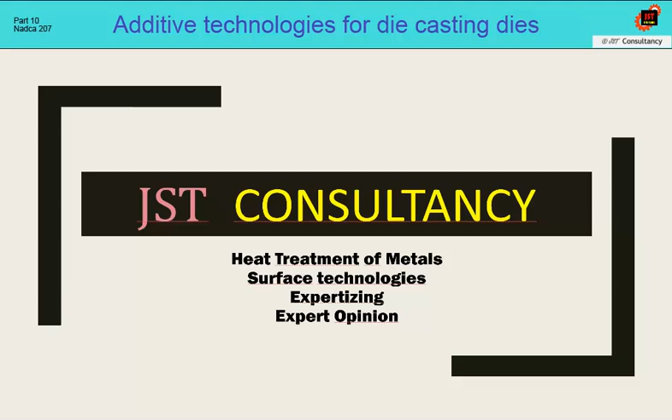In this tenth part of the course, we will focus on additive technologies that come into consideration for the production of die-casting dies. Additive technology brings new possibilities to the production of die-casting dies. However, because it is a completely new, rapidly developing technology, there is a lack of support in process design, similar to that provided by Nadca 207 for classically manufactured steel materials. Therefore, we will try to clarify some of the problems and explain the content of the newly published Nadca 550 document, entitled Tooling Certification for Die-Casting Die Components Fabricated by Additive Manufacturing.

Although additive technologies represent modern and progressive methods of manufacturing metal parts, it must be said that Nadca 207 does not yet know these technologies. The word doesn't know should be understood in the sense that it has not been verified that 3D printed parts have identical properties to parts produced by conventional methods, and it is therefore not entirely clear what their resistance to thermal fatigue will be. It is also not yet resolved if the powder materials for 3D printing are identical to those classically produced and recommended, or if they will be recommended completely differently.

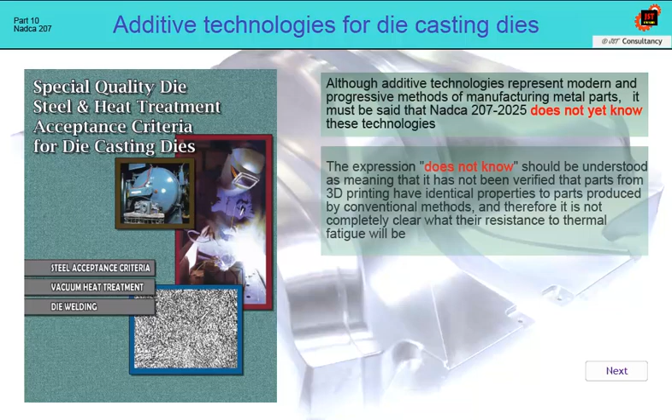The problem must also be seen with standardization. Therefore, in order for AM technologies to have the same definition as classic ones, there must be standards for terminology, parts design, powders, for printer qualification, for printing processes, for all post-processes including hot isostatic pressing technology, for testing, or for operator qualification. Only when all this is done can additive technologies appear in the Nadca 207 specification.

But it takes time. The first step is the document published by Nadca under number 550. It already partly answers our questions about 3D printing, but still in a general way. However, it does not address the lifespan of the mold parts produced in this way at all, and is therefore only a basic document, which must be followed up with more detailed specifications in the future.

Therefore, it is necessary to accept the fact that the use of inserts from 3D printing technology has a legal pitfall in that it must be approved by the tool owner or the die-casting foundry, which will use the tool with an emphasis on economy and with awareness of all possible risks.

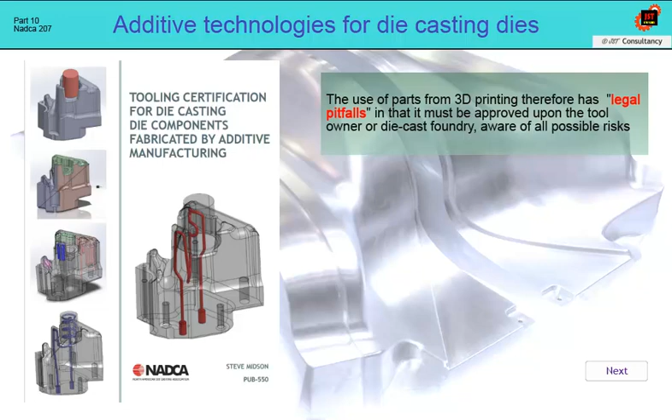Even before we start in this course with the description of individual technologies and operations, we should ask ourselves what our expectations and our doubts are. How should we actually prepare drawing and technological documentation for individual parts of the die-casting die?

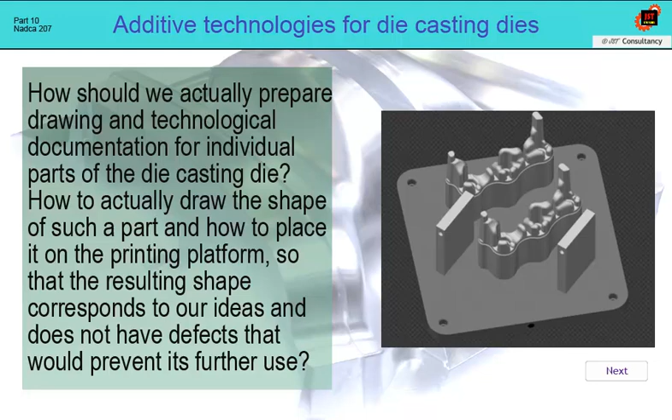How to actually draw the shape of such a part, and how to place it on the printing platform so that the resulting shape corresponds to our ideas and does not have defects that would prevent its further use? How to ensure that after printing we get a net shape, or if that is not possible, a near net shape? Which powder steel should we choose for our part in the die-casting dies?

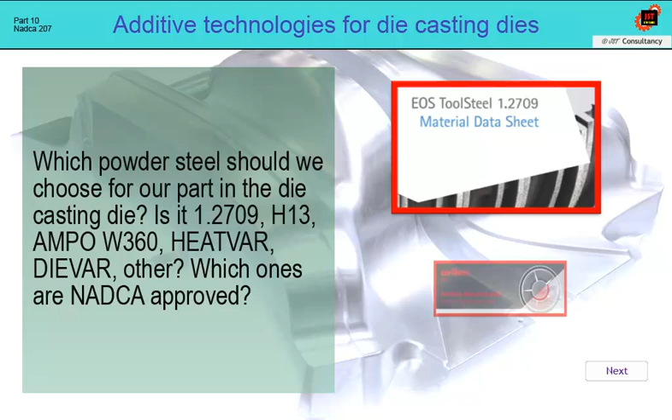Is it 1.2709, H13, Ampo W360, Heatvar, Dievar, or other? Which ones are Nadca approved? If we already choose powder steel, is it described what the quality of this powder should be?

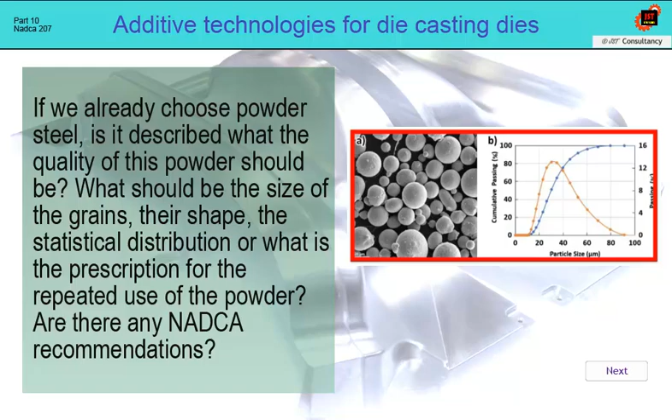What should be the size of the grains, their shape, the statistical distribution, or what is the prescription for the repeated use of the powder? Are there any Nadca recommendations?

If we print a part from the selected powder steel, is the permissible porosity of the parts defined after 3D printing? And is it even economically possible to print parts with minimal porosity? Is there any Nadca regulation or recommendation for printing parameters?

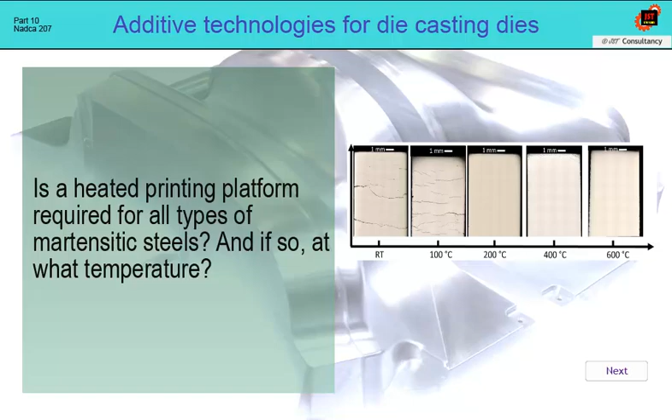Is a heated printing platform required for all types of martensitic steels? And if so, at what temperature? As in heat processing, the vacuum furnace must be in a validated state, according to AMS 2750. Is there any regulation that says how to validate the printers so that the results are reproducible?

If we already print the part, is there a prescription for heat treatment and all other post-operations to maximize resistance to thermal fatigue? Under what conditions can hot isostatic pressing be omitted? And under what conditions must we apply it?

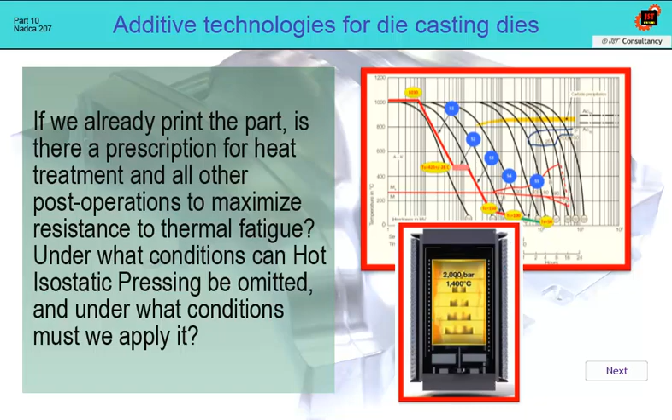Is there any regulation on how to test the print result? It can be assumed that we will need to perform reference toughness tests on each printing platform to verify the printing process. Do we have information on how to place these samples on the platform and in which direction, so that they best represent the state after printing?

We will try to answer all these questions on the next slides.

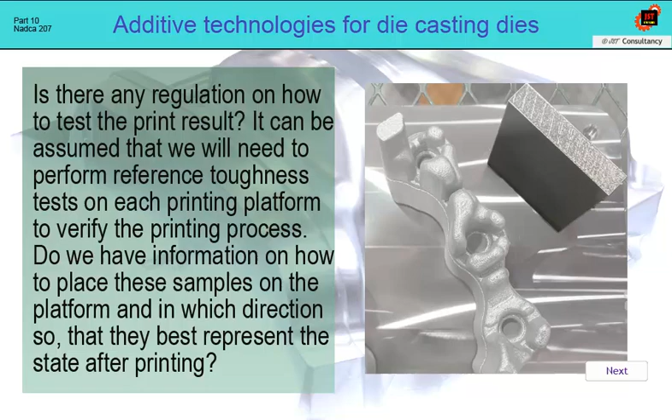What do we actually imagine when we think of additive technologies? These are new, modern production processes based on powder technologies. Their benefit is completely new possibilities for the production of shaped inserts.

On the other hand, this novelty is an obstacle because they are not sufficiently verified, and therefore they are only slowly getting into norms and standards. The development of the Nadca 207 specification shows how long and complicated the path was to create a generally recognized standard

for achieving maximum resistance to thermal fatigue for classic wrought steels. It is therefore a long way off, and the full integration of AM technologies into production processes will take some time. However, not all of these additive technologies are suitable for die casting molds.

Therefore, all those that use binders, such as the binder jet method, MIM, metal injection molding, can be excluded. In the following, we will therefore only deal with technologies that work only and exclusively with the application and melting of metal powder without a binder.

With AM technologies, the part is created on a 3D printer by gradually applying layer by layer. What takes weeks, sometimes even months, with conventional technologies can be achieved in days and with a single clamping.

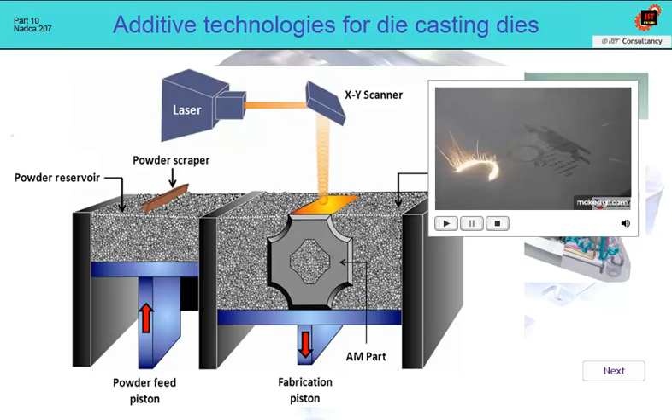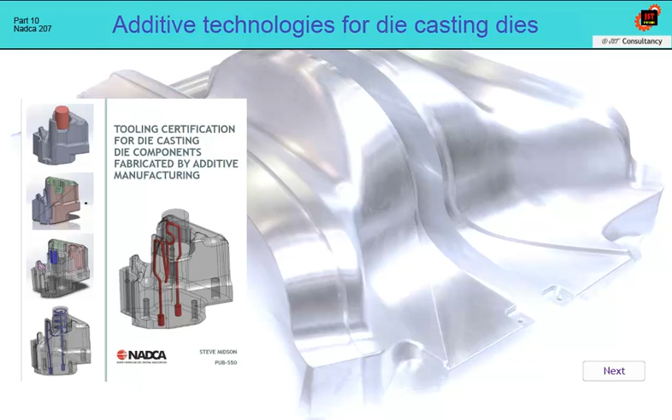If we are going to talk about AM technologies according to Nadca publication number 550, then we have to focus only on those that are applicable to die casting dies. There are two basic ways.

The first is a method called direct energy deposition or direct metal deposition. This is a method where a layer of metal is applied from additional powder or wire by fusing with a laser or an electron beam.

This method can be advantageously used for repairs and renovations of die casting inserts, or for surface modification, but only exceptionally for prototyping. Considering the way the process is conducted, there is no significant dimensional limitation on size.

For example, this device for DMD technology is a portal version with a table size of 1000 by 600 millimeters.

The entire range of powder materials can be successfully applied, from powder steel type H13 through maraging steel 1.2709, various stainless steels to superalloys based on titanium, chrome, or nickel.

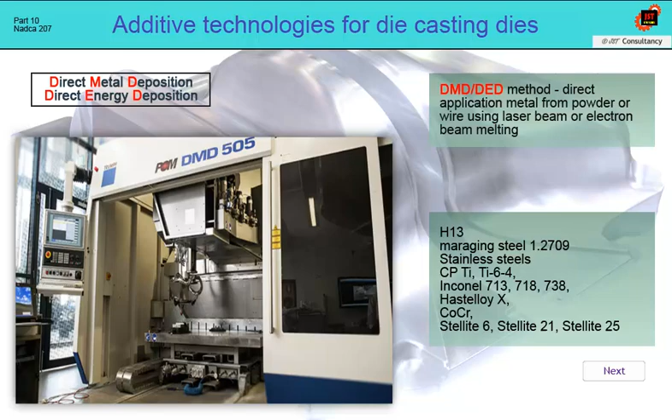However, it is necessary to take into account that, even in this case, printing must be followed by some heat treatment procedures, especially annealing to remove stress. This is also why access to the same size equipment for heat treatment must be ensured.

The method is not suitable for the production of large compact inserts due to the high investment costs and the size of the equipment. Printing time combined with high depreciation will create a significant economic barrier.

A new progressive solution to this technology is also a series of machine tools from the DMG Mori company. For example, the LaserTech 125 DED Hybrid, where the application of powder materials by the DED method and the subsequent machining of dies are combined in a completely unique way.

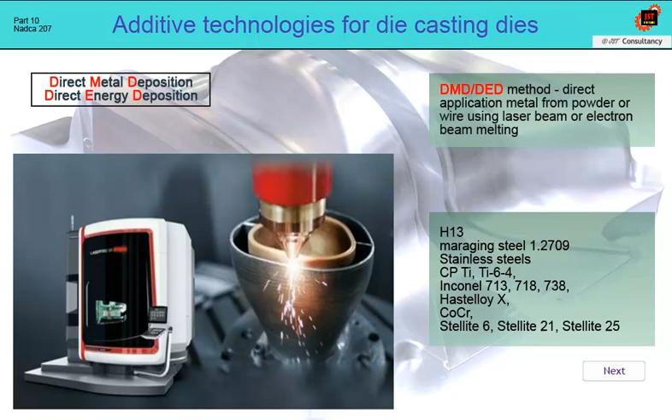The second method, according to the Nadca 550 publication, is the powder bed fusion method. It is a 3D printing process where the printed product is created layer by layer by gradually fusing the powder.

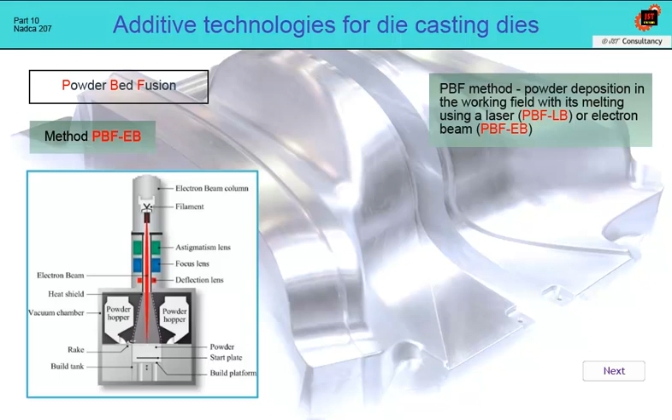Two basic methods are currently used: the electron-beam melting method, when the melting source is an electron beam, and the selective laser melting method, when a laser beam is used to melt the powder.

In the first case, the layer is formed in a device with a high vacuum, because this vacuum is a condition for the existence of an electron beam.

In the second case, the layer is applied under atmospheric pressure of a neutral gas, such as nitrogen or argon. However, the laser beam and electron beam methods are so different that they are not interchangeable, and this needs to be taken into account when manufacturing die casting dies.

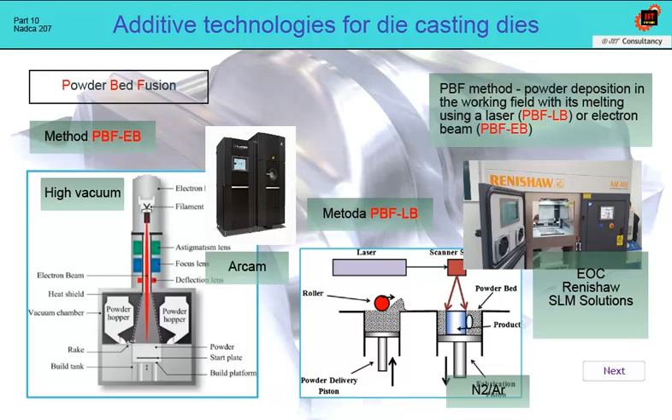Equipment representatives for the laser bed fusion method are equipment from EOS, Renishaw, or SLM Solutions, while for the electron beam method, they are equipment from Arcam. For clarification, the name SLM is the trademark of the technology of the company SLM Solutions, and the abbreviation DMLS is the trademark of the company EOS.

Today, the most widespread printing method is powder bed fusion with laser beam. This type of printer allows you to print all metals as alloys of copper, aluminum, titanium, and various types of steel. The process takes place under atmospheric pressure of nitrogen or argon, depending on the type of material.

Due to the intensity of melting, gaseous nitrogen can be partially split into atoms, and it can then bind to the molten metal in the form of nitrides of alloying elements, such as chromium, molybdenum, vanadium, titanium, and others. Therefore, for highly alloyed materials with nitride-forming alloy elements, it is necessary to use neutral argon gas. This also applies to material H13 or

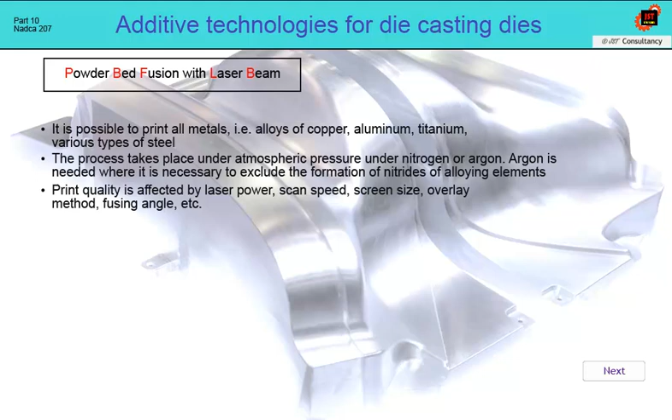1.2709. The quality of the print is affected by the laser power, scanning speed, raster size, the way individual traces are overlapped, the fusing angle, and many others.

The actual product is printed on a metal platform that can be preheated to 200 to 500 Celsius, but the powder melts when cold. Due to this method of printing, the product is subjected to high stresses, and within 24 hours after printing, it should be subjected to annealing to remove the stresses.

If an air-hardenable material such as H13 powder steel is being printed, then this problem is even more pronounced due to the martensitic transformation taking place.

The advantage of this method is its availability, and above all, the fact that the powder enclosed in the cooling channels is easy to extract after printing. This property enables printing of special inserts with cooling channels, unproducible by classical methods.

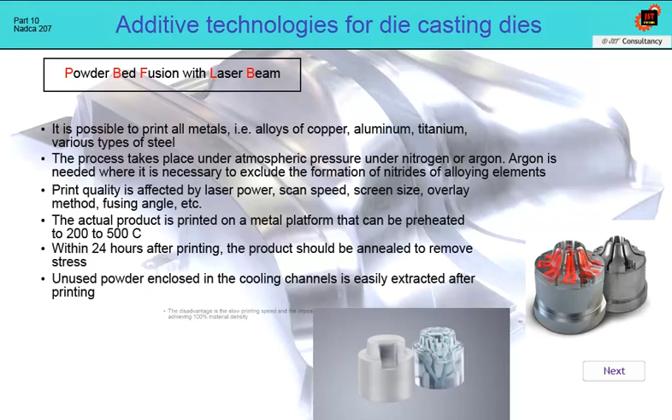The disadvantage is the printing speed. Pictured is a spare part made of 1.2709 material weighing 89 kilograms, which was printed on a printer with 4 lasers for 17 days. This method cannot print a product with 100% density.

The maximum achievable density is tied to the economy of printing. If we want to apply this printing method, then the production process consists of the following operations: pre-operations, actual printing, annealing to remove stress, and separation of the product from the base plate.

If we want 100% density, then hot isostatic pressing, heat treatment for H13 material hardening and at least 2 tempering cycles, cleaning and surface treatment, product inspection and completion.

The condition for applying the powder bed fusion method is therefore not only a printer, but also a stress annealing furnace with temperature range according to the printed material, or access to hot isostatic pressing technology and vacuum heat treatment.

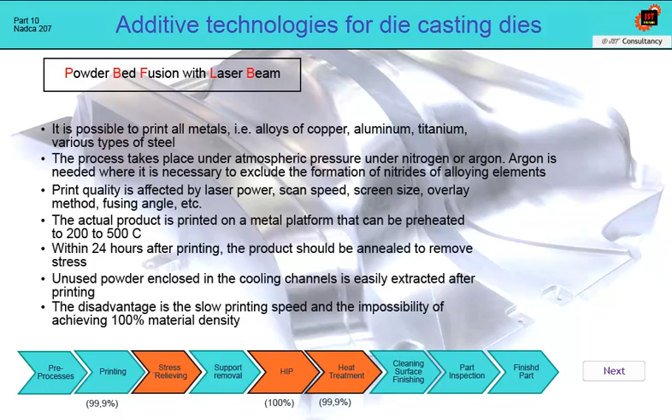In the following video, you can see how the printing method looks in practice. The source of the video is promotional materials from EOS Company.

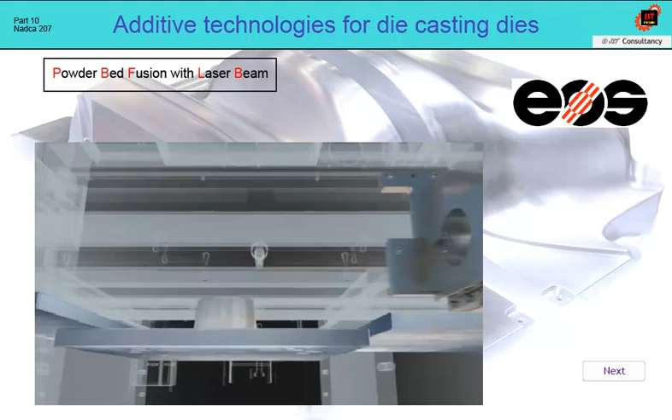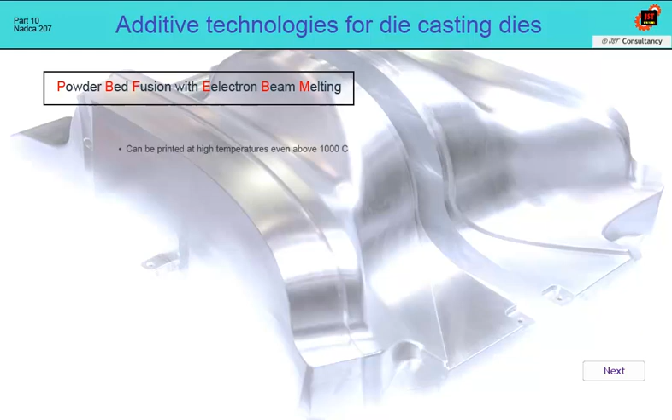The second printing technology, electron beam melting, has some advantages over the method with laser beam. Above all, it is possible to print at high temperatures, even over 1000 Celsius, and thus without significant internal stresses. There is therefore no risk of the product having cracks, as is the case with the laser method.

The electron beam has significantly higher performance and scanning speed. The print surface is first preheated by the electron beam, then the contours are created, followed by hatch melting. Because the beam has a high speed, it can simultaneously print several products at once.

As in the previous case, the print quality is tied to a number of process parameters. Their setting is then part of the know-how of the one who prints the products.

The disadvantage of this type of printing is that it is not possible to print easily vaporizable metals such as zinc, magnesium, lead, or copper, and alloys of these elements.

But the big advantage is that it does not need a platform for printing, and the parts are printed in space in a powder bed. Therefore, the volume of the chamber can be better used for printing efficiency.

A big disadvantage is that due to the high energy of the beam, the area around the printed product is also affected, and it is therefore not easy to extract the powder from narrow or blind cavities.

This is a major weakness of die casting dies, and therefore this type of printing on die casting inserts will only be used exceptionally. The production procedure will be similar to the previous case, but it will not be necessary to apply the annealing operation to remove stress and separate the product from the platform. So the following steps are: pre-operations, printing, removal of products from the powder bed, and cleaning from the powder.

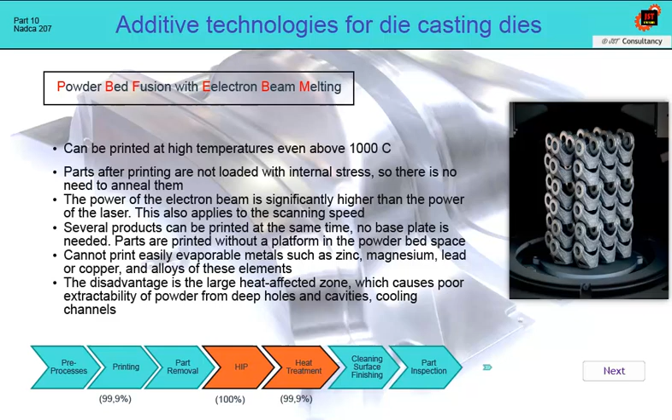This video will show you the electron beam printing method. It is a presentation material from Arcam.

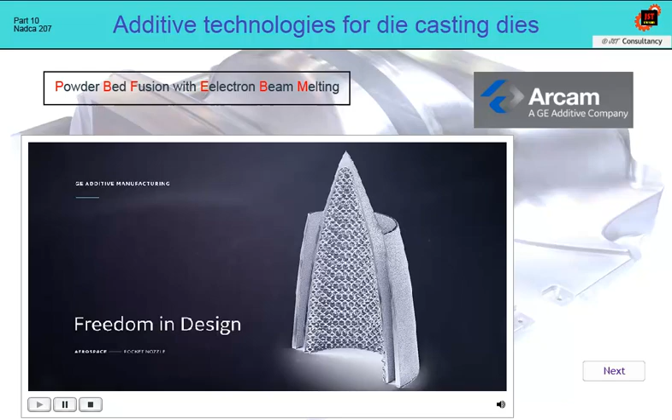Additive manufacturing offers greater freedom in design and allows for the creation of optimized parts that are not constrained by the limits of traditional manufacturing. Arcam EBM has the unique ability to tightly stack parts within the build in order to increase productivity.

An optimized build file is sliced and loaded into the Arcam EBM system. Following this, metal powder is loaded into the machine. The build chamber is then closed and a vacuum is created to ensure a clean, controlled environment that allows for the processing of reactive material.

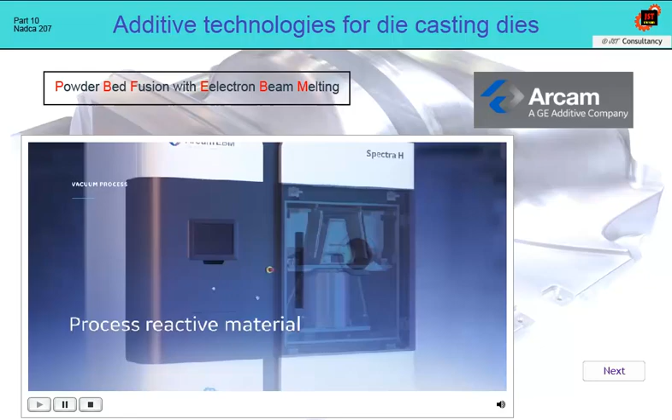Next, Arcam EBM's powder layering system evenly distributes a thin layer of powder on the build area. A powerful 6 kilowatt electron beam heats the powder bed to the optimal ambient temperature and then proceeds to melt the powder: first contour melting and then hatch melting.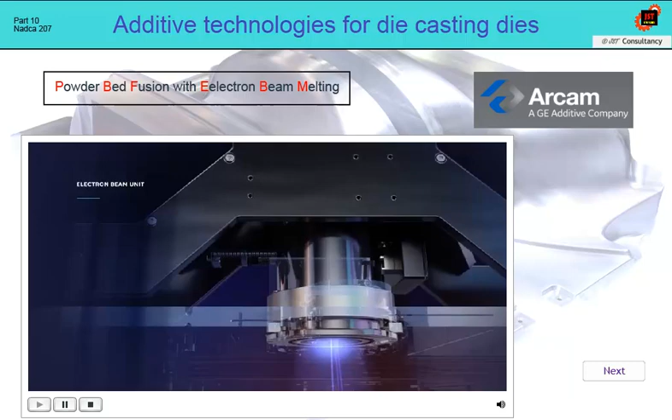The electron beam unit generating the beam contains no moving parts, allowing for extremely fast and accurate beam control. The build environment is kept hot, reaching temperatures exceeding 1000 degrees Celsius, resulting in no residual stresses and allowing for the processing of crack-prone materials.

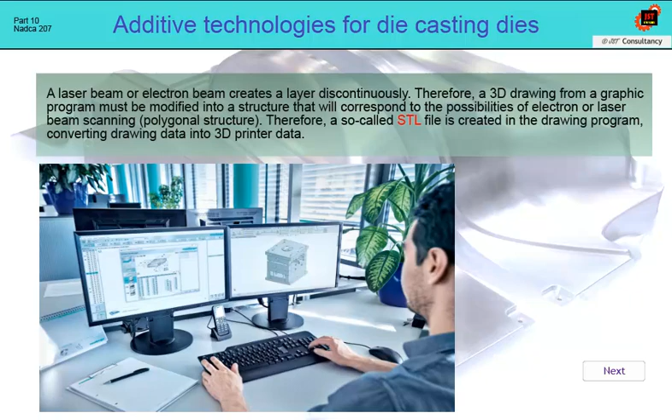The beginning of every design for 3D printing is digitization. We draw what we wish to produce in a 3D graphics system. Today, the most commonly used professional systems are AutoCAD, SolidWorks, CATIA, but free programs such as FreeCAD and many others are also considered.

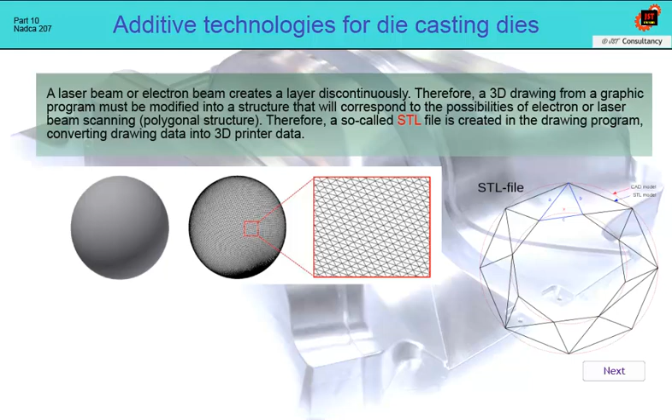What is important is that the drawing must be converted into a polygonal structure corresponding to the scanning motion of the laser or electron beam. A so-called STL file containing instructions for the 3D printer is created. This file represents the transformation of our idea into data for 3D printing.

The density of the polygon mesh for printing is adjustable, and the printing time will correspond to this density. The material density or porosity will also correspond to the printing strategy, as well as the mechanical properties, or as a result, the material's resistance to thermal fatigue.

The printing strategy is also very important for the result. As you can see, it can be one-way, two-way, or so-called zigzag, in the case that the beam melts the material alternately there and back.

Part of the printing strategy is the multiplicity of remelting, where one spot of the surface can melt once, twice, or even 3 times. This will, of course, be reflected in the porosity of the material and the number of defects after printing. As part of the printing strategy, the target density requirement is also set.

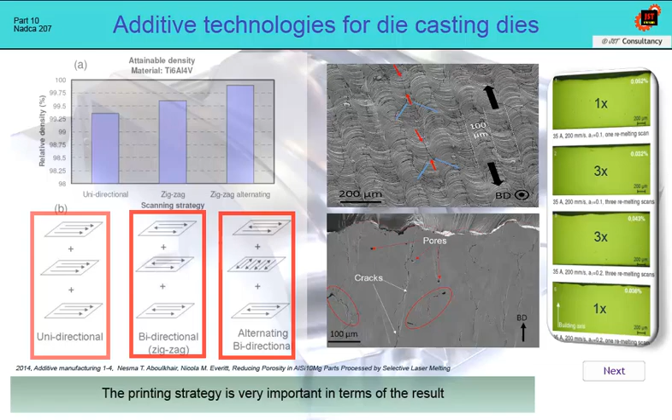As a very important parameter for hot work steels of type H13, as well as for other carbon steels with martensitic transformation, is the temperature of the substrate plate. This has a significant effect not only on the internal stress, but also on the resulting density and structure.

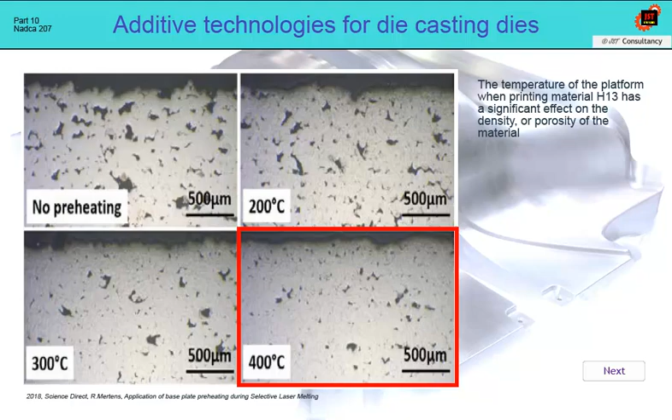One of the reasons is that if we print at a temperature above the martensite start, one of the problems is reduced, which is the martensitic transformation in the initial stages of printing. It has been verified that if the platform temperature is 400 to 500 Celsius, then the applicability of this technology for hot work steels will be significantly improved.

Even if it is only a preheating of the platform for the initial layers of printing, it must be remembered that other subsequent layers are heated from the melting process, and when the printed product is gradually immersed in the powder bed, the body of the printed insert will maintain a high temperature in the powder.

Heating to 500 Celsius significantly reduces the stress in the printed product and at the same time reduces the effort to bend. On the left of the picture is the prediction of internal stresses in a body made of titanium alloy.

Ti6Al4V material at a substrate plate temperature of 500 Celsius, on the right side at 200 Celsius. Internal stresses are significantly lower.

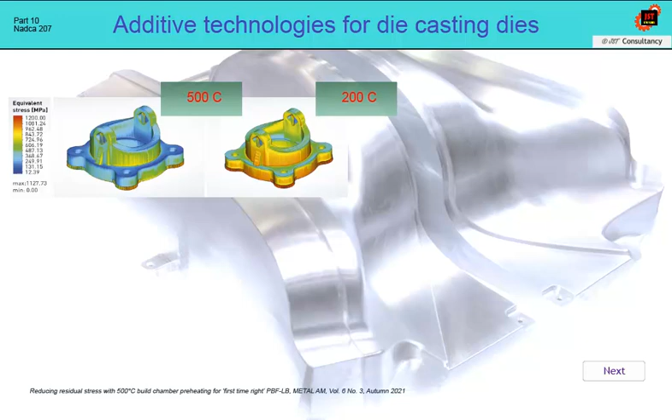Printed at a temperature of 200 degrees Celsius, image on the right, and the state after printing with a heated substrate plate at 500. The difference is quite obvious. The high temperature of the platform reduces the stress in the printed product, and thus also the tendency to form internal cracks.

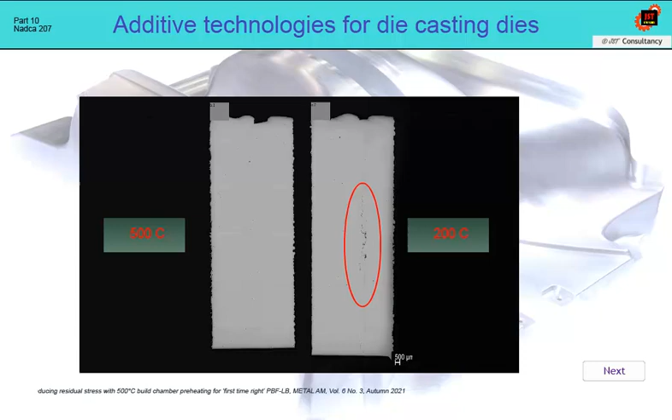The strategy of the printing will fundamentally influence its economy. If we were to try to print a cube with a side of 200 millimeters and a weight of approximately 63 kilograms, with a thickness of individual layers of 100 microns, the distance between the tracks also 100 microns, then the printing time would be 18.5 days.

At an estimated hourly rate of the printer of 100 euros per hour, the price of printing would be 44,000 euros. The print density will be somewhere around 98%. We don't know if it's acceptable quality, but it's definitely an unacceptable price.

If we increase the grid to 200 micrometers, then the price will drop by half. But at the same time, the porosity of the material will increase to 89%. But this is already a value that does not guarantee us high-quality mechanical properties.

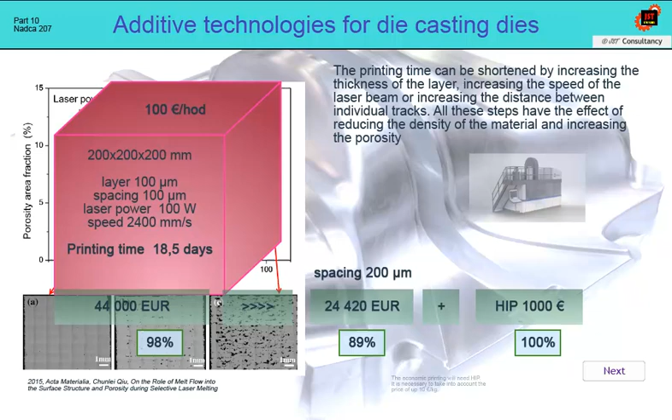That's why we have to start thinking about hot isostatic pressing technology. Even if we have a density of 89%, after applying hot isostatic pressing, we will achieve a density of 100%. However, the cost of HIP will only be up to 1,000 euro, meaning a saving of almost 20,000.

It is a question of what criteria to set for the use of HIP technology, when yes and when not. We do not know the relationship between the toughness of the material, resistance to thermal fatigue, and porosity. But since porosity represents random defects that we cannot recognize from a macroscopic point of view, hot isostatic pressing significantly increases our certainty that these random defects will be removed.

At the same time, it allows us to print with significantly lower density, which means cheaper. Therefore, if printed parts are to have the same service life as parts made of forged material, hot isostatic pressing technology should always be used.

I have already mentioned the example of printing a moving part of a die made of powder maraging steel 1.2709, weighing 89 kilograms on an EOS M400 printer with 4 lasers. The printing time, even though it was done on the most modern and powerful printer, took 17 days.

And what was the economic result? When all the costs and all the benefits were added up, the overall result of the project was a loss of -40% compared to the state when this part was manufactured in the classic way.

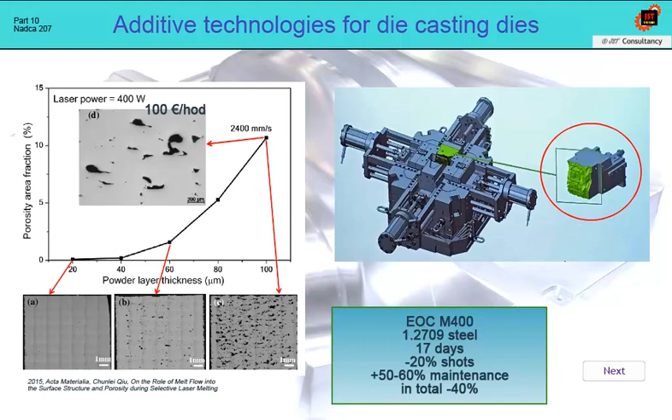What exactly is HIP technology? It is a technology called hot isostatic pressing, and its meaning is that at close to the material's melting temperature and at high pressure of up to 2,000 bars of argon, it suppresses most of the porosity inside the material.

This is also very important for die casting dies. If a printed part is to have the same thermal fatigue life as a compact, classically produced material, it must also have 100% density, or be close to it.

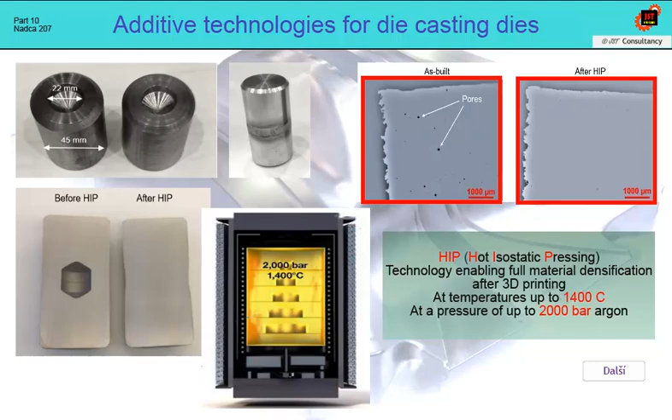But there is one more aspect, that is the reliability of the result. The pores in the printed product are randomly distributed. They may or may not be there. But this cannot be recognized from a macroscopic point of view only by destroying the part and doing metallographic evaluation. This is, for example, the problem of blades for aircraft engines, produced by the investment casting method. Precisely because there is no certainty of a non-porous state, the hot isostatic pressing operation is mandatory on every piece.

The same principle must therefore also be applied to die casting dies if we want to maximize service life. The only problem is that hot isostatic pressing production capacity is not always available, so the problem is circumvented by trying to optimize printing so that HIP does not have to be applied. This means choosing a printing strategy so that the density of the material after printing is as close as possible to 100%. But economic reasons clearly speak in favor of HIP technology.

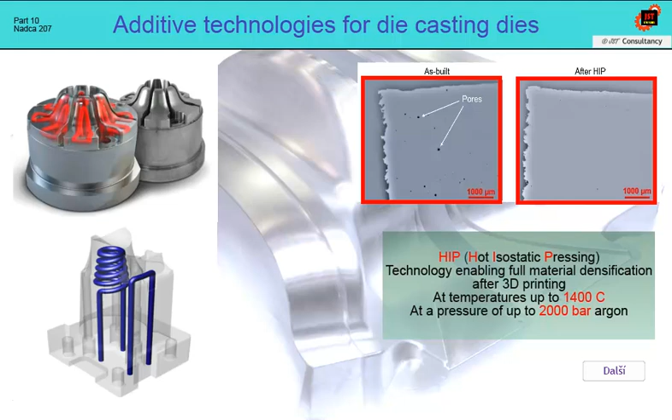If we accept the current situation where HIP is not available, and at the same time the printers only have a heated platform up to 200 Celsius, then we have to put up with high internal stresses in the printed product. This applies both to maraging steel 1.2709 and especially to carbon steels with martensitic transformation of the type H13, Dievar, AMPO W360, and others. Examples are in the picture.

The disadvantage of internal tensions is that they are not tangible, and we only find out their presence at the moment when a crack occurs. In order to avoid this, it is necessary to include stress relief annealing as quickly as possible, within 24 hours at the latest. This stress relieving is done before the printed part is separated from the printing platform.

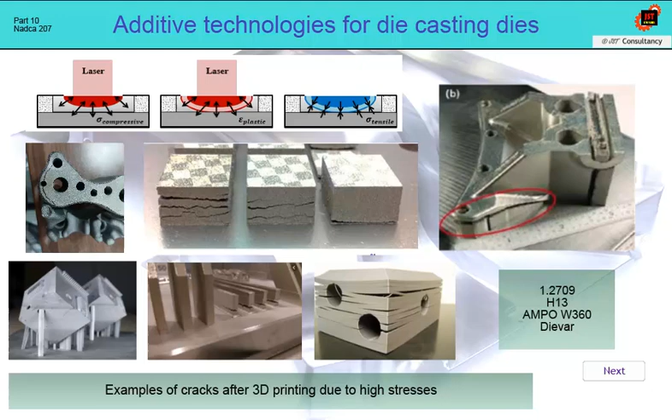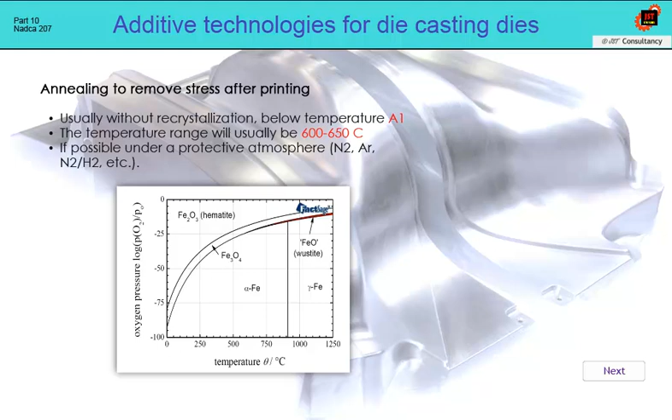Stress relief annealing is a process without recrystallization, below temperature A1. The range from 600 to 650 Celsius is usually used, but it depends on the material from which the product is printed. Since annealing takes place at temperatures where oxygen diffusion can already play a significant role, it is necessary to anneal in a protective atmosphere or, even better, in a vacuum furnace. This is the only way to prevent oxidation along the grain boundaries, which can worsen the impact strength of the material. Stress annealing without a protective atmosphere is not recommended.

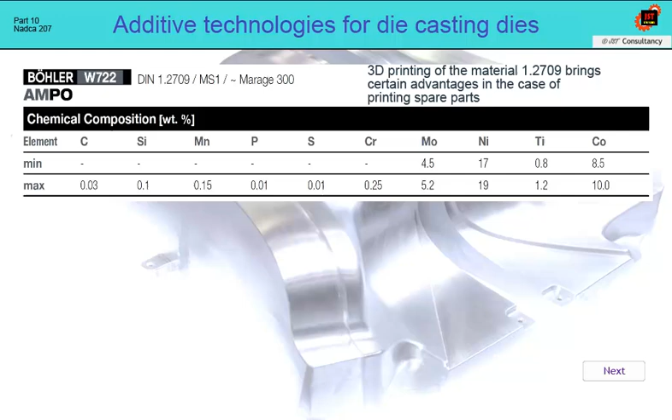Now we are getting to our own materials, which can be used for 3D printing of parts for die casting. The most common is maraging steel 1.2709, also known as Marage 300. Böhler sells it under the trade name AMPO W722.

It is a steel with almost no carbon, so there will be no problem with martensitic transformation. This is also the reason why printing with a platform temperature below 200 Celsius can also be considered. The internal stresses will be lower than if we were to print from steel type H13 or other carbon steel of a similar type. This steel is also specific in that it does not require heat treatment at high temperatures.

Annealing to relieve stress is replaced by precipitation hardening, or aging. At temperatures of 490 to 540 Celsius, the hardness of the material increases due to the precipitation of intermetallic phases. The holding time is normally applied from 2 to 8 hours, but the time does not have as significant an effect on precipitation processes as temperature does. Importantly, in addition to the precipitation of intermetallic phases, this process also releases stress from the print.

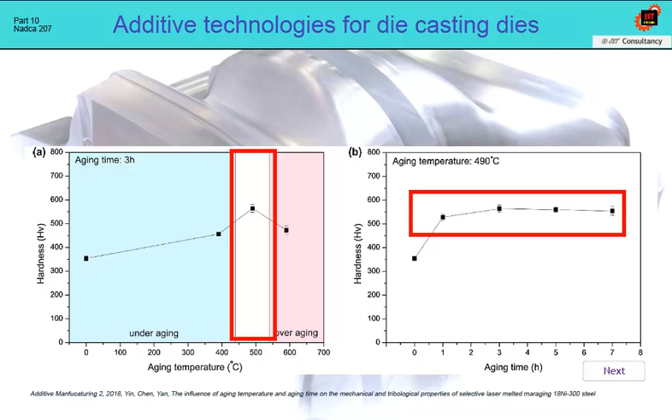Although the use of this steel for die casting dies means a simplification of the printing process and subsequent thermal operations, the main disadvantage of this material is that it does not achieve the resistance to thermal fatigue that we know from forged materials. This can be seen in the presentation from the Böhler Company, where the ratio between the thermal fatigue resistance of the material 1.2709, both classically manufactured and used for 3D printing, is shown, all in comparison to material H13. Although this is a commercial presentation, the value of 30% for use on die casting molds is not very optimistic.

So this steel can only be recommended for rapid manufacturing of spare parts, for die repairs, for prototyping, but not for OEM parts.

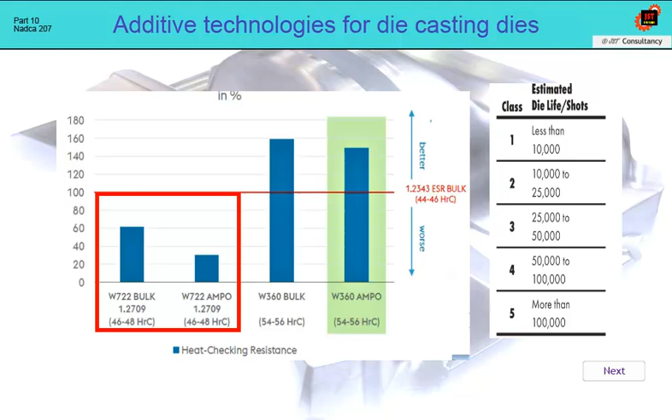And if so, we must already take into account this predicted life when designing the die, and produce 2 or 3 pieces instead of 1 insert, so as to ensure the target life of the die-casting die will be reached.

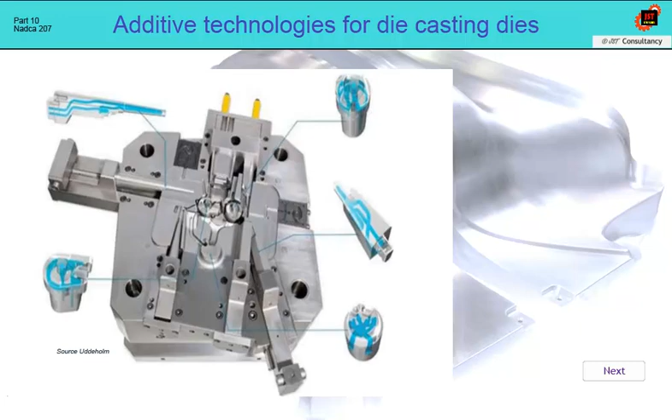If we were to believe that NADCA 207 recommends the right materials, then we should focus on available powders from this category of steels for die-casting dies. This is primarily the H13 material, when powders can be purchased, for example, from the Oerlikon Company. The Böhler Company launched a powder under the name AMPO W360, which corresponds to steel type 1.2367 in its composition. And last but not least, the Uddeholm Company started offering Dievar steel powder.

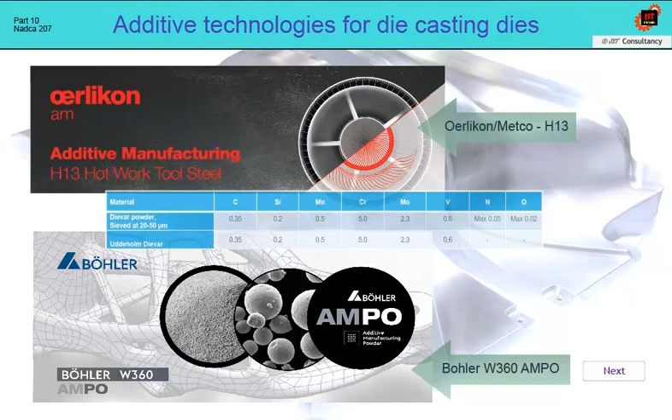It is just a question of which printing strategy to choose so that the thermal fatigue resistance is at the level of classically produced steels. What is unclear is the temperature of the heated substrate plate, when a large part of the literature shows that a temperature above 400 Celsius significantly increases the success of printing. And further, it is the use of HIP technology to eliminate random defects or to improve the economy of printing when printing with a thickness layer above 40 microns.

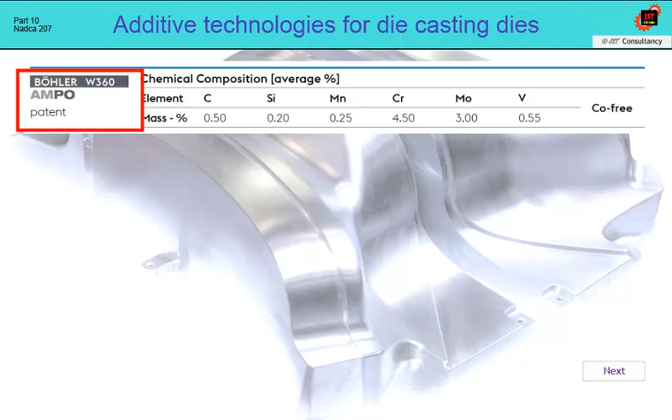This image shows the datasheet from Böhler Company for AMPO W360 powder. It is the first commercially published data for impact strength values on 3D printed parts. If we compare these values of 8 to 14 joule with the NADCA 207 values for the same type of steel, then these values are equivalent to the NADCA 207 recommendations. So the average value is 13.6 joule.

The minimum is 10.8 for the test of steel capability. It means after hardening in oil. However, since we do not examine input properties in 3D printing, but print finished parts directly, the values of 10.8 and 8.1 joules after hardening for classically produced steel are worse than the values reported for powder steel.

That is very optimistic. However, the Böhler Company does not publish the printing parameters, nor if it has applied hot isostatic pressing technology, so it is up to the user to verify and confirm the printing parameters themselves.

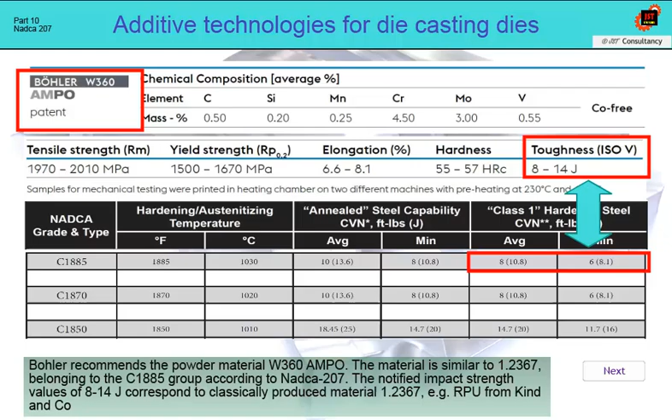For verification, however, it must not be forgotten that samples for impact tests must be printed at the same time as the insert itself. But it is also necessary to remember whether the samples will be in the plane of the platform, or perpendicular to it, or at an angle of 45 degrees. In all cases, the result will be affected by this very fact, as well as the subsequent hardening and tempering, which must certainly be implemented.

In the case of printing material H13, AMPO W360, Dievar or Heatvar, the following procedures are possible. The first process flow involves only printing and stress relief annealing. The printed part is used without quenching and tempering, with a structure corresponding to the annealing process. The part properties depend on the powder quality, printer, printing parameters, printing strategy, platform temperature, and many other parameters, and it can be assumed that the structure will contain a high amount of only once-tempered martensite and a large portion of residual austenite, with very negative properties to meet the thermal fatigue resistance requirement.

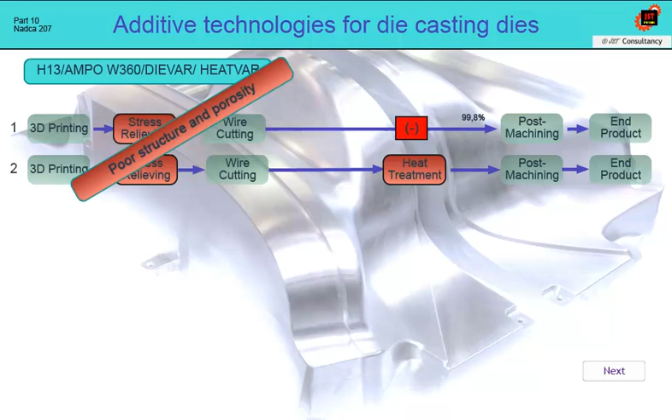The second process flow already applies vacuum heat treatment. Since there are no known verified recommendations for quenching and tempering, probably the least evil is to apply the same heat treatment procedure as for the compact material according to NADCA 207. This process flow changes the brittle structure after 3D printing to a tough structure with double or triple tempered martensite, with some residual austenite. The only problem will be how the porosity of the print affects the thermal fatigue resistance.

The third process flow already includes HIP. This will ensure that the structure will be non-porous and 100% dense after printing. It should be noted here that HIP does not and cannot solve surface defects. With Quintus devices, it is then possible to perform all operations at once, that is, both annealing to remove stress and HIP, as well as subsequent hardening and tempering. Whether such a process is economical is up for consideration.

In any case, whether this process is carried out in one or more furnaces, it is the only way to maximize the mechanical properties, and thus thermal fatigue resistance, of the 3D printed die casting dies. All thermal processes should preferably take place in a vacuum or under a protective atmosphere. 3D printing must therefore also include access to these technologies and the corresponding furnaces.

If we really want to maximize the useful properties, we cannot risk losing part of them by using an unsuitable device for the given thermal operation.

Now let's do a recapitulation. Additive technology for the production of die-casting dies can be applied if it is agreed between the tool supplier and the user. Nadca is still validating this technology, and parts made with the AM process are not guaranteed to have the same lifespan as parts produced by classic technology. For the manufacturing of die-casting dies, the powder bed fusion with laser melting method is preferred over electron beam technology. The direct metal deposition method can be used to repair inserts and restore their shape, where the additional material is powder or wire, and the source is a laser, electron beam, or arc discharge.

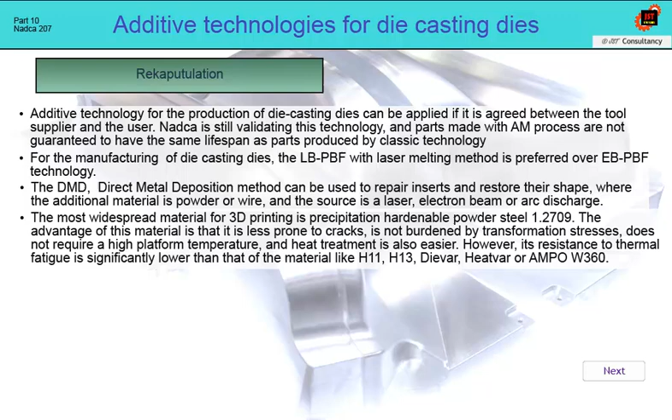The most widespread material for 3D printing is precipitation hardenable powder steel 1.2709. The advantage of this material is that it is less prone to cracks, is not burdened by transformation stresses, does not require a high platform temperature, and heat treatment is also easier. However, its resistance to thermal fatigue is significantly lower than that of materials like H11, H13, Dievar, Heatvar, or AMPO W360.

AM parts should be printed from powder steels with martensitic transformation. These prints require a high platform temperature, at least above the martensite start line. Annealing for stress relief must be included within 24 hours at latest. Subsequent heat treatment, hot isostatic pressing, or quenching and tempering is no longer time-limited.

If there is a reason for 3D printing, for example more efficient cooling of the insert, the economic parameters of printing need to be taken into account. Hot isostatic pressing technology can bring significant savings. Nor did the Nadca publication number 550 provide binding rules for the printing of die-casting mold parts. That is still the future.

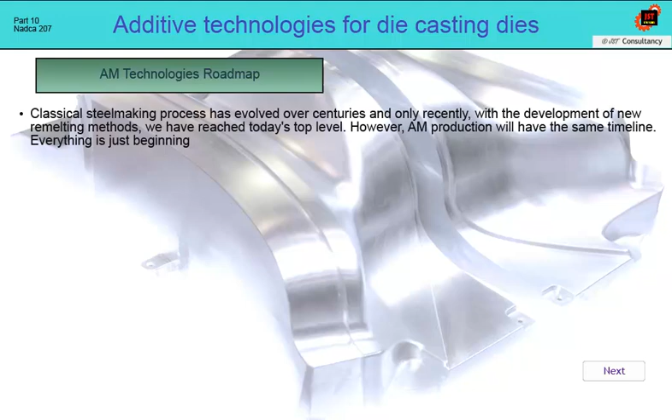What to say in conclusion? The classical steelmaking process has evolved over centuries, and only recently, with the development of new remelting methods, have we reached today's top level. However, AM production will have the same timeline. Everything is just beginning - manufacturing and assortment of powdered steels, technical level of printers, printing parameters, post-processes. The estimated roadmap for AM technologies is for at least the next 10 years.

This is also why Nadca 550 does not draw any conclusions, and the only absolutely essential recommendation is to collect data, evaluate it, and adapt the subsequent process with regard to our previous results.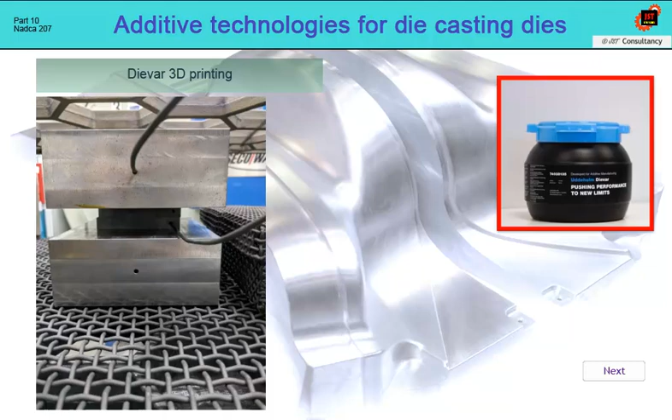In conclusion, I will provide some results from our research activities. Since wrought Dievar steel has shown excellent results in the long term, we have also invested in this steel in powder form. Regarding the technological process, we believe that reliable results cannot be achieved without hot isostatic pressing technology.

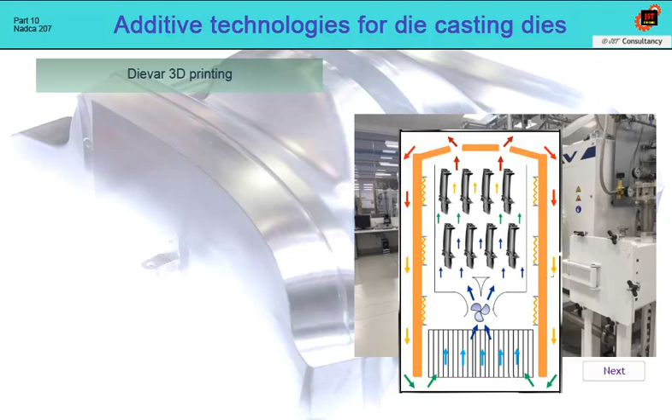Even if we ignore the economics of printing, we cannot stabilize the results of 3D printing without eliminating hidden defects. It is the same as with parts for the aerospace industry. Aircraft engine blade castings, as well as other parts produced by the investment casting method, are strictly subject to the hot isostatic pressing process. The reason is not that it is impossible to cast parts without defects, but that despite all efforts, there may be hidden defects in the casting that need to be eliminated. The same applies to 3D printing.

The reasons for internal defects in 3D printed parts are obvious, and our analytical methods are not sufficient to completely detect and eliminate them. And if you're not convinced, even though we have a print density of 99.97%, the material still contains millions of submicron pores. Our process therefore consists of 3D printing, hot isostatic pressing, and subsequent heat treatment in vacuum furnaces.

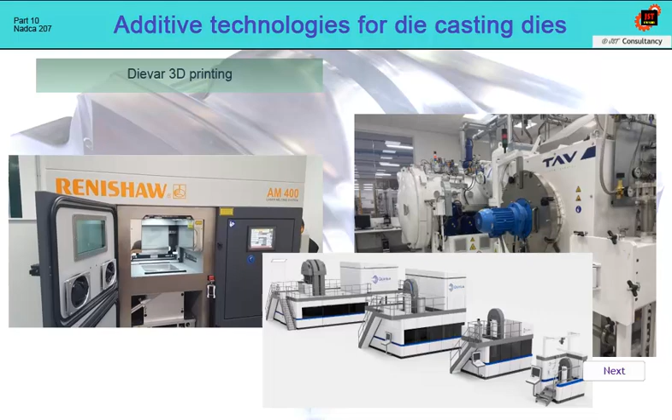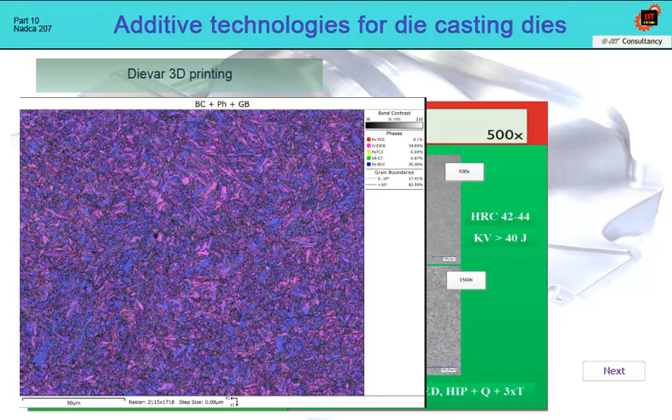The figure shows typical fine-grained structures. The most interesting thing is that after quenching, we do not have a fully martensitic structure, but a structure in which there are more than 34% carbides and approximately 5% retained austenite. This structure changes after the first tempering, and only now do we detect a structure with tempered martensite, without carbides and near zero retained austenite.

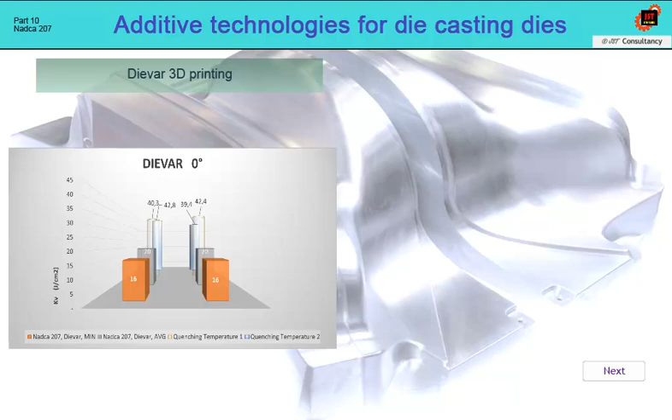As for the residual austenite, even if it is detected after hardening, immediately after the first tempering we see that it has completely transformed into martensite. Overall, it looks very promising.

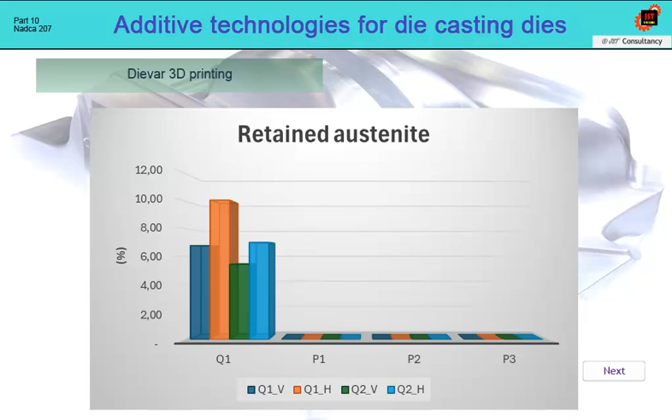However, we are just starting with real pieces, so we will see. The development continues, and there are still many things to be clarified. In any case, we can already say today that the material from 3D printing behaves differently than the classic forged material, and we have to deal with that.

The production processes of such inserts for dies for high-pressure casting will therefore differ from those we use for classic production according to Nadca 207. We are just before testing, and at the moment it is difficult to say what the service life of such an insert will be. But we still hope that our path is logical, and that using hot isostatic pressing we will prepare the die material in top quality and without potential defects in the structure.

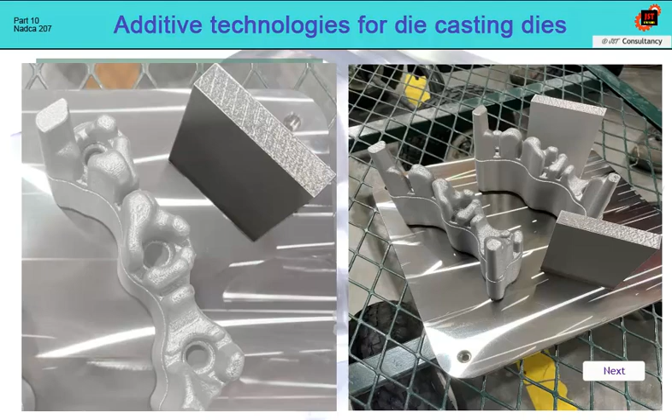If you want to try it too, don't forget to print impact test samples with each platform. These must go through the entire process, just like the die insert. Only when these impact tests are performed can we say that we have met all the necessary process parameters and properties for thermal fatigue, and we have proof that we are reaching the values required by Nadca 207.

The course of additive technologies for die casting dies is over. It includes my many years of experience and practice. However, the issues can be very complex and extensive, and may not exactly match your experience.

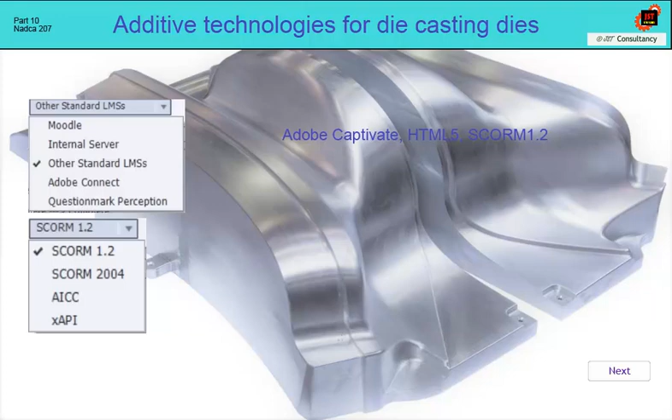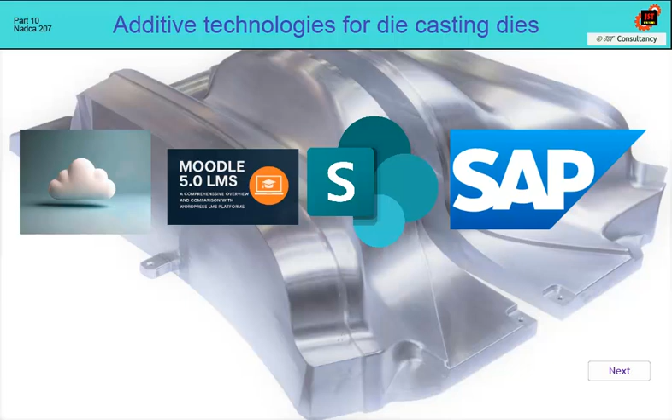You can then install this file in your corporate cloud, in Moodle LMS 5.0, on SharePoint, or in the HR module of your ERP system such as SAP, which can communicate with a learning management system LMS that meets the SCORM specification. In this case, you will be able to prepare a training plan for each employee, including an evaluation of its implementation and success rate.

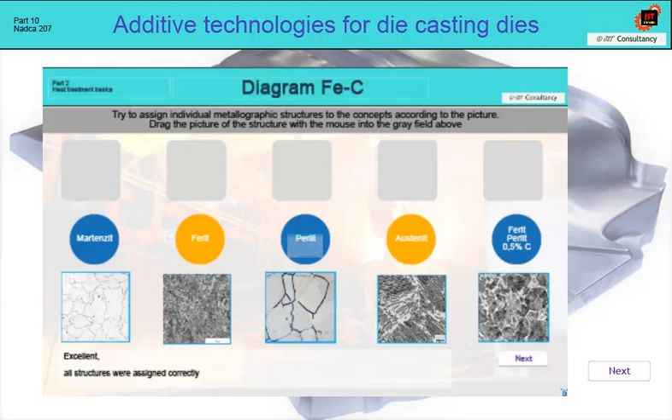Each course contains a test with many questions, and the output is a certificate of successful completion of the course. You can archive these certificates and use them for employee motivational rewards.

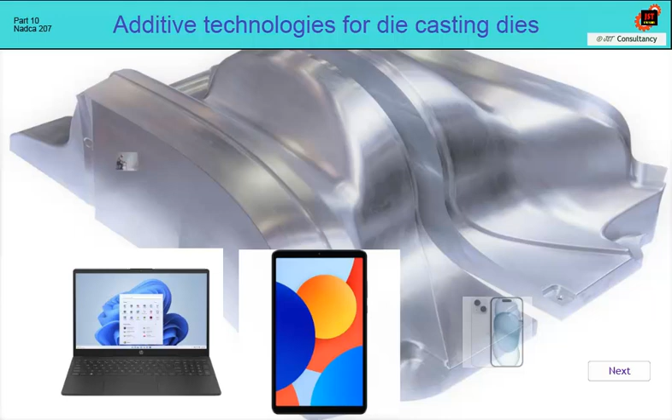The advantages of e-learning are obvious. The employee does not have to go anywhere. They can complete the course anywhere, on a computer, tablet, or even a phone, at work, on vacation, or even at home. And you will be sure that they have the necessary knowledge to understand what is happening in the heat treatment operation. I do not know of any disadvantages, so I just hope that these courses will serve you and be useful to you.